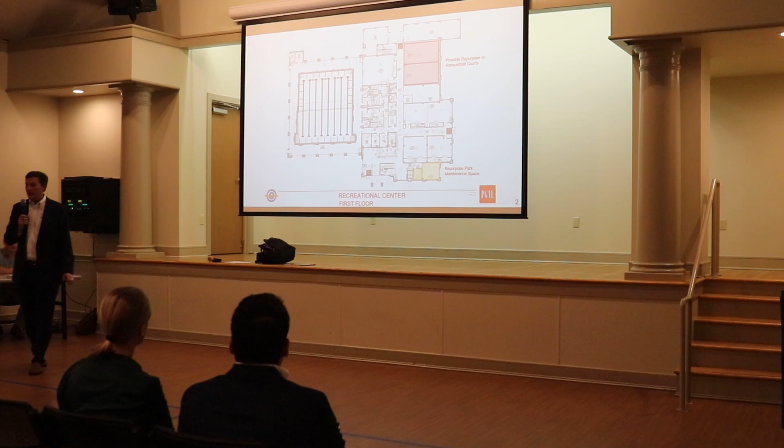So the two areas, there are areas on both the first floor and the second floor. This is the floor plan of the existing rec center that you might be familiar with. You've got the pool located here. This is the entrance, the reception desk, the classrooms, the locker room areas, multi-purpose room, the racquetball courts that are located here.

So the areas that are open for reconsideration, these two spaces here in yellow, those are spaces that are going to be moved to the new public works facilities as part of the Dinkins project. So that square footage is available for reuse. And then the other area being considered for possible reuse based on use is the racquetball courts, and whether or not those could be modified to accommodate different kinds of programs, and what kind of programs could those be.

And then areas on the second floor are the areas here in red. This is where cardio and the weight room are now. There's some office space, and then this is the open balcony area.

There's been discussion about potentially those spaces need to expand to offer more options for equipment or for other activities, stretching, other things. So what we're hoping to gather in this first section are the community's thoughts about the rec center building and what your thoughts are about potential new opportunities that should be considered.

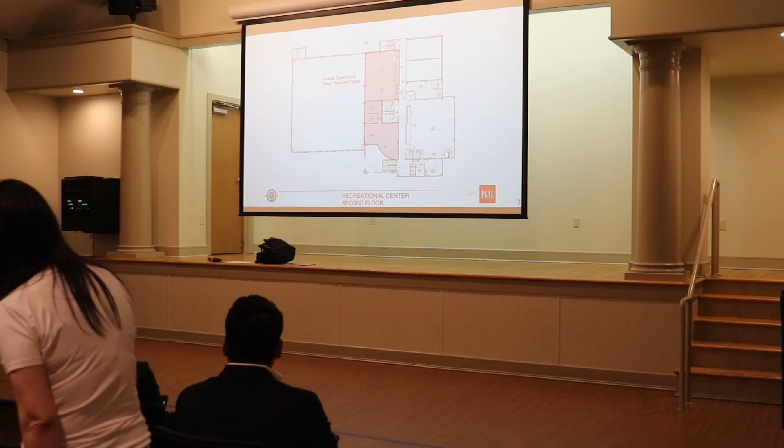What we're going to do with that information is gather it and take it to the Parks Board, and they're going to start their process about how they normally do for park improvements, to go through other public conversations. But this will be the beginning of gathering the community in this room about what your thoughts are regarding that.

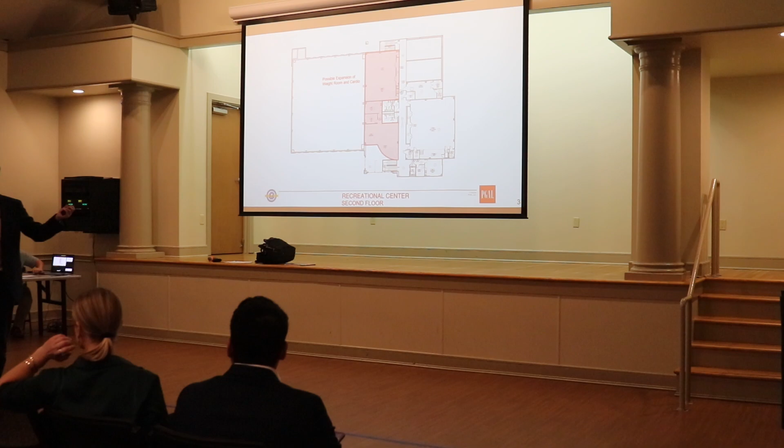So you should have received a piece of paper, and there's more if you need. You should have pens. What we're hoping you will do is take the time to write out any thoughts you have about the rec center, specifically about the areas we mentioned that are in consideration for either modification or repurposing. So any questions about that?

Yes, sir. I apologize, maybe there were materials I should have read beforehand, but I'm concerned that question may be a little too open-ended, and I was hoping you could narrow it down a little for me. For instance, downstairs there's currently 2 racquetball courts. When you say repurpose, do we have any global idea of what we're talking about? Because there's a million things that could be done, right?

For sure. I think what we're looking at is, if you think about it in programs, because that's the easiest way to think about it, what types of programs or spaces would be good additions to the rec center offerings that are already there, right?

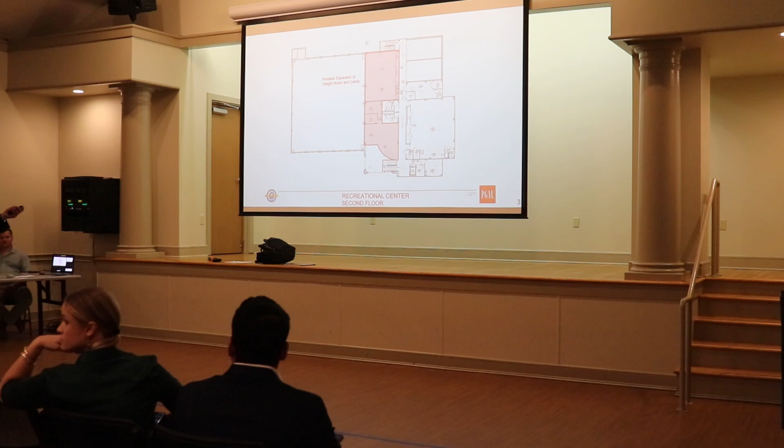And so I think the obvious answer is that there was a time when there was consideration about maybe putting some other use, maybe a basketball goal was being considered at one point. It's too small, I can tell you. It's too small for a pickleball court because I was asked to evaluate that, but it is too small for that.

But that is the area that is here. This center wall can be removed, so that can be either a big space or it could be multiple other spaces. Yes, sir. So just to be clear for myself and maybe anyone else, think of it as a big square with a hard floor.

Well, the flooring could be changed, right? The ceiling could be modified, but the shell walls that would be there, obviously the outside wall is likely going to stay. This wall, and then obviously the front wall. So basically it could be 2 separate spaces, or it could be 1 big space, right?

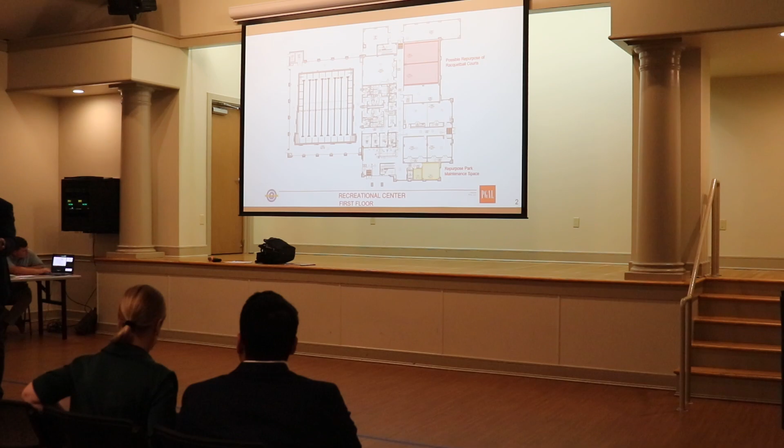And I know that there has been feedback from the community about potentially an indoor play area for toddlers, one conversation that I know the city has had. But there could be other types of uses that you have as users of that space.

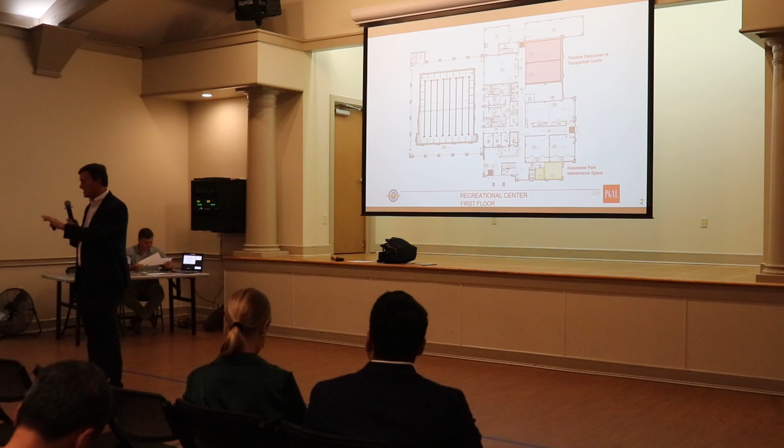But again, this is the beginning of the programming process. We're not making decisions tonight. This information will go to the Parks Board, and we'll be telling the Parks Board what information was gathered here, and then they'll be engaged in the process about how it ultimately gets pulled together. Does that make sense? Okay, does anybody need a comment card or a pen?

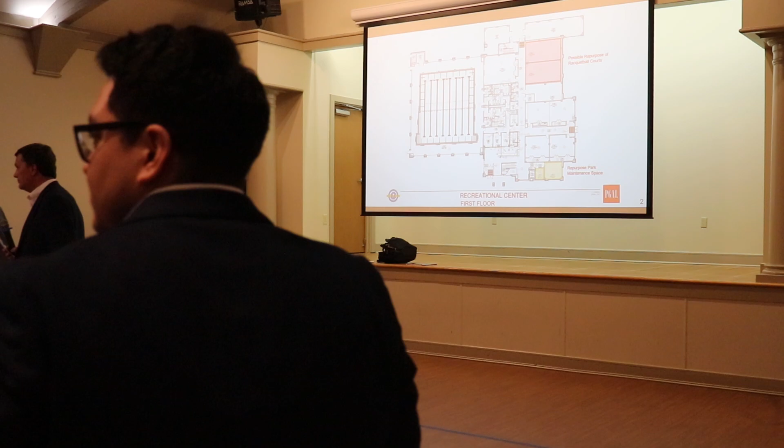Embarrassed to read handwriting, so if I can read mine, I think I can read yours.

Okay, the first comment here is: make it more modern and new. Weight room and cardio room expansion is needed. More modern. Yoga, meditation classrooms. Make center more inviting, more beautiful, kids play area.

The next one is: a week ago, I, along with half a dozen other parents, stood in front of the city council and shared personal stories about the safety of our children due to vehicular traffic in West U, and each of us advocated strongly for council to fund pedestrian mobility efforts for the sake of safety for our children.

I am pleased that the council is taking action, and as part of the new master plan is advocating to close Milton Street between College and Auden. This section of Milton is rarely used, and it is a one-way road that causes confusion. I have witnessed drivers going the wrong way on this section of Milton many times. Closing it and making it a pedestrian corridor is the exact thing we should be doing.

I strongly encourage our city to push forward with this design and continue pursuing other pedestrian-friendly projects. So this sounds like it's more related to the next piece, so I'll reread this one when we get to that one, because there'll be some more to talk about.

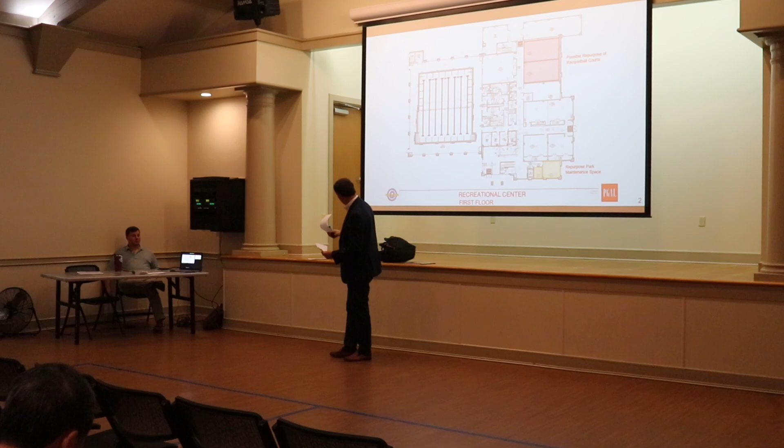The next one is, why do we not open at 5 a.m. anymore?

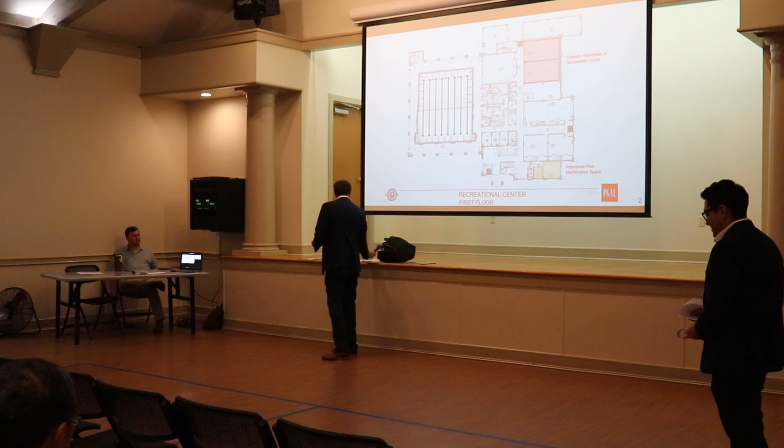The next one is, please expand the cardio and weight room. It's too much wasted space upstairs, not enough weight equipment.

The next is, expand cardio weight facility. Two rowing machines are in the hallway. People also go in the hallway to stretch. Racquetball court two, and then there's nothing after that. And then there's badminton, question mark, and the yoga rooms, question mark.

The next one is, I use the pool two times per week and gym area three or four times, usually come between 9 and 11 a.m. Rarely have trouble accessing equipment or the pool lane at that time. Current configuration suits me well. Biggest need is probably space for mat work, which many folks now do in the hall, perhaps the yellow area.

Which I think they mean this area here. The next one is, very good, no need to expand.

Any other comments regarding the recreation center? Yes, I do think, having spent some time looking at this, that those old maintenance rooms, the yellow ones, are very small. So whatever it is we end up doing, I think we have to keep our minds on what has the smallest footprint, because that's definitely what you need to focus on when it's the maintenance space. A number of people talk about mats, right? Mats have a small footprint, individual maintenance. Just taking that out, okay, thank you.

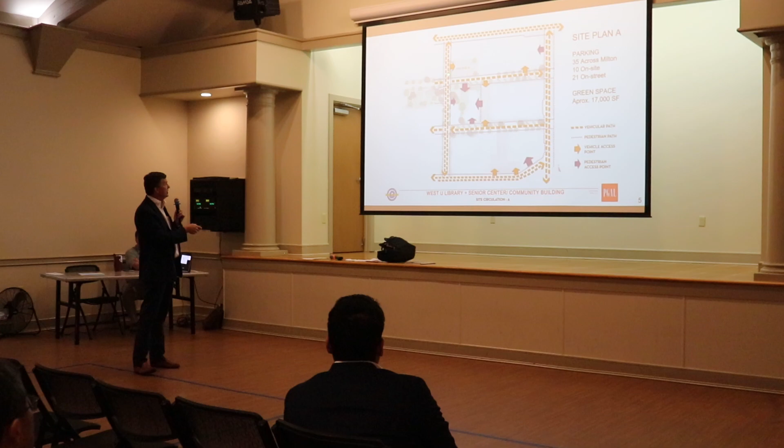We also want to remind you that pedestrian traffic through this area is important. Currently there are sidewalks on all the perimeters, but as part of the urban planning, there was discussion about enhancing those sidewalks, making them wider inside the Civic Center area, as a potential option to help mobility of pedestrians to the Civic Center. That could happen on these various side areas within the zone.

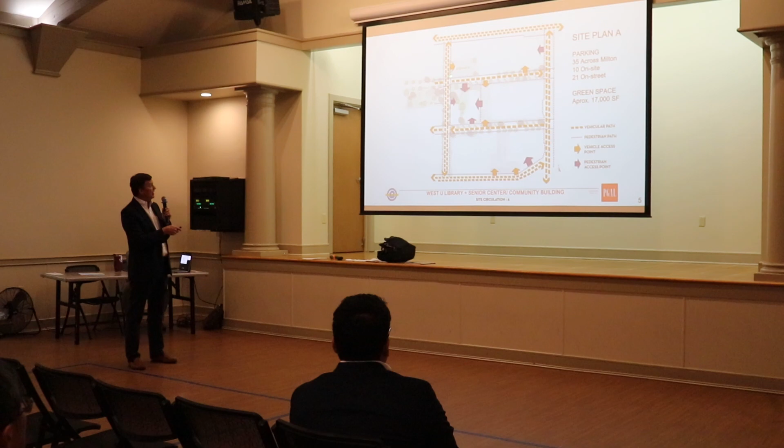So we're showing you how vehicles would access city parking lots. This would turn into a city parking lot, which is where the operations and maintenance buildings are now. There is a single loaded parking lot drive access located right at this edge of the site, with 90-degree parking located on the side. Pedestrians would access the municipal building and this site the way they do today, and cars would get into those parking lots like they do today.

Again, I'm only showing city-owned parking in these examples. In Site Plan A, in this area, which includes this parking lot and the street parking, there are 35 parking spaces in this zone. There are 10 more parking spaces I'm calling on-site, right here, and 21 angled spaces on street.

So that gives you an idea about what parking we're showing in this area under this scheme. And this represents about 17,000 square feet of green space, not counting the area around the existing water tank.

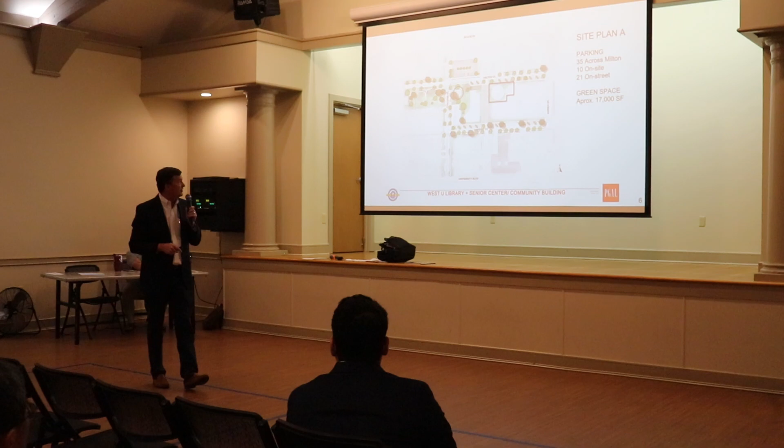If you can go to the next slide, please. So this is just a more rendered version of that same site plan, so you could understand. We are intentionally isolating the water tank from this conversation. So we want to gather feedback on circulation by itself. We're going to want to get information on the water tanks by itself, and the building test fits by themselves, and then the architectural strategies by themselves. So we're trying to isolate those so we understand your feedback on which topic more clearly. Does that make sense? So again, we're focused here on circulation, and this just gives you an idea about how that could work. And again, we've colored in the city parking on-site parking spaces.

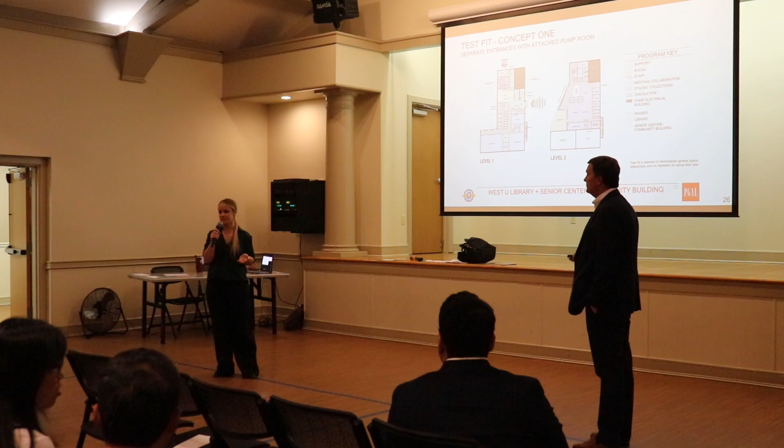As Jeff mentioned, there are two big ideas we would like your feedback on. Again, we're really looking at adjacencies, how these spaces are next to each other. But the two big ideas are how you enter the building and how the lobby is shared between these two spaces. So in this first test fit, concept one...

This one is separate entrances with the attached pump room. If you remember the previous examples with the tank options, this one has the pump room attached to it. In this option, you enter the library off of Milton into a separate lobby with checkout spaces, a feature stair with some tiered seating, and all of your library sorting spaces behind the lobby, then you go upstairs to the main library.

So you have to enter on the first floor—that's where you enter. For the community center side, it's a completely separate entrance. You enter from the parking lot that we've created, into a lobby. You can go into a gaming area, and then as you go down the corridor, it has all of your staff spaces and meeting spaces.

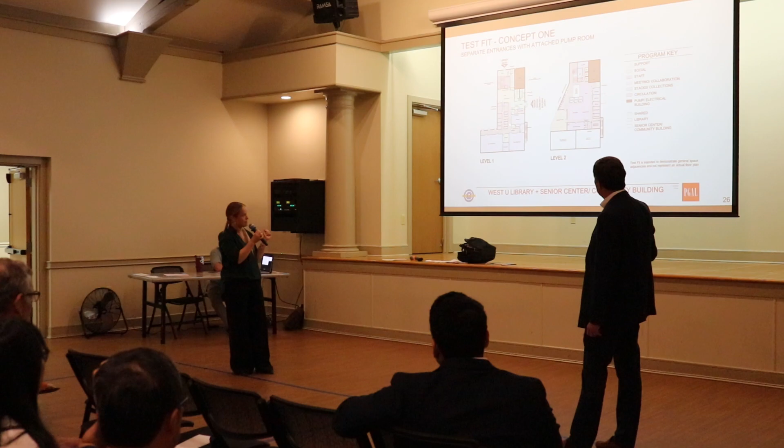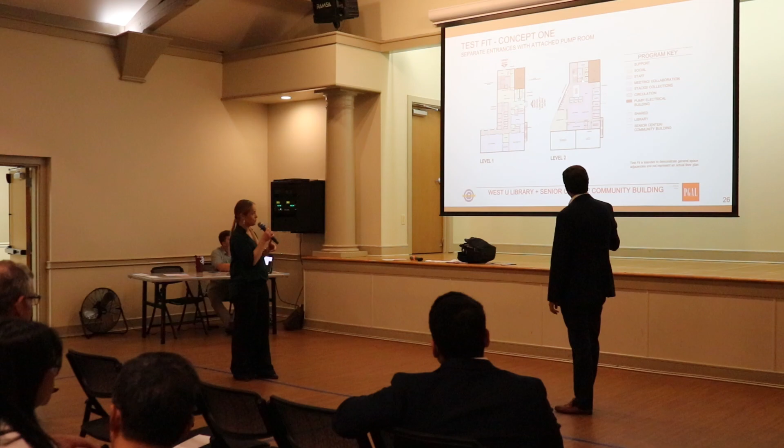So that's really the big idea. Now, where all these spaces end up, as Jeff said, is going to change and shift as we progress, but that's one of the big ideas. As you move upstairs, all the library spaces, with the exception of the entry, are located upstairs. So you enter, and you have all your stacks centrally located, restrooms, an outdoor patio, and all your meeting spaces around the perimeter with staff spaces. That is how we're separating these two functions.

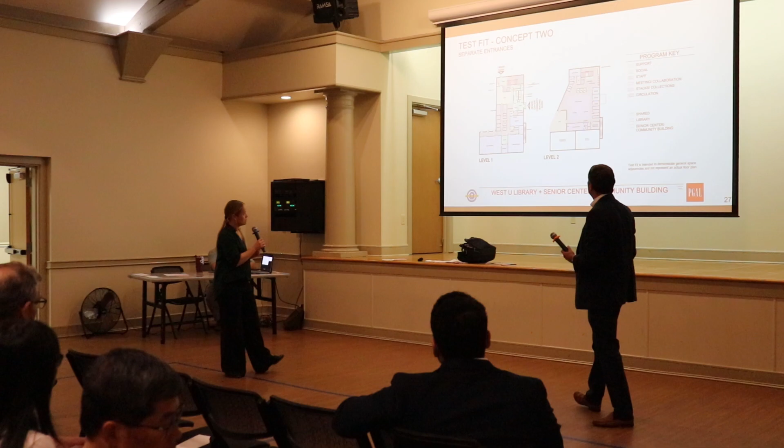So concept two is the same, except we are detaching the pump room. This gives us a little bit more flexibility with the building, but as you can imagine, less flexibility on the site. So that's just something to keep in mind.

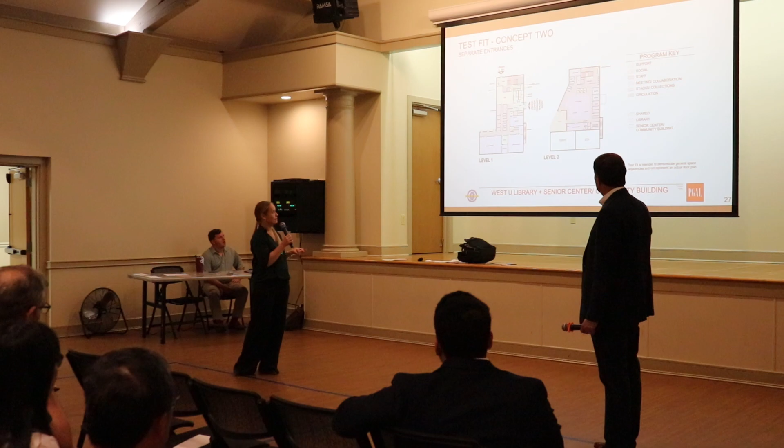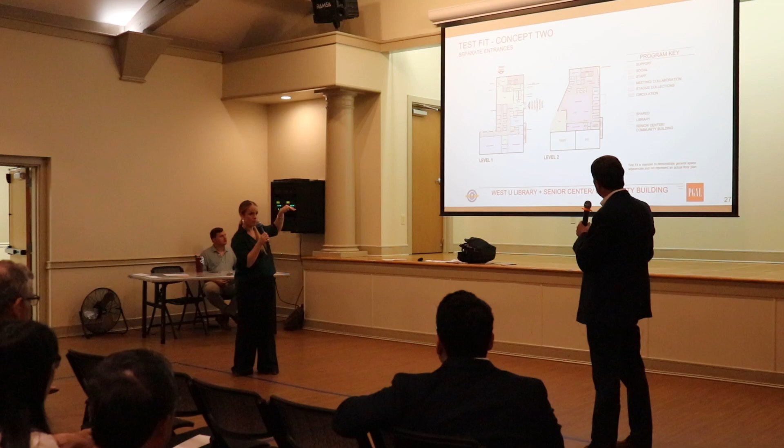But you still enter the library separately from the community center, and they're separate functions. You enter from separate sides, separate streets. There's not a lot of overlap, except if you want to go to the community center, you have to walk outside the building to go to the library and vice versa. So the big idea on this one is there are two identifiably different entrances to these two functions. The library is essentially on the second floor, the seniors and community building is on the first floor. To get from one to the other, you have to go outside and go in a different entrance.

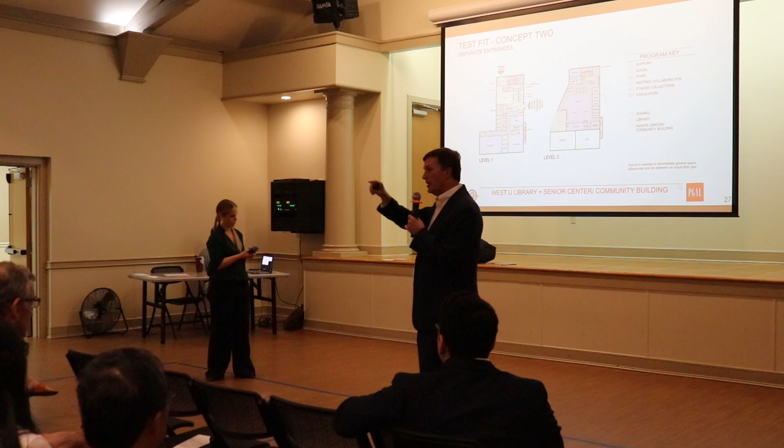Can we go through all of it? What's the size of the building? Is there more books? Generally speaking, what size are y'all? So the program for the community building is a few thousand square feet more than here, as well as the library, which is 1,000 to 1,500 square feet bigger as well. Full spaces grow, yeah. So let's get through all of it, and then we can come back for number 3.

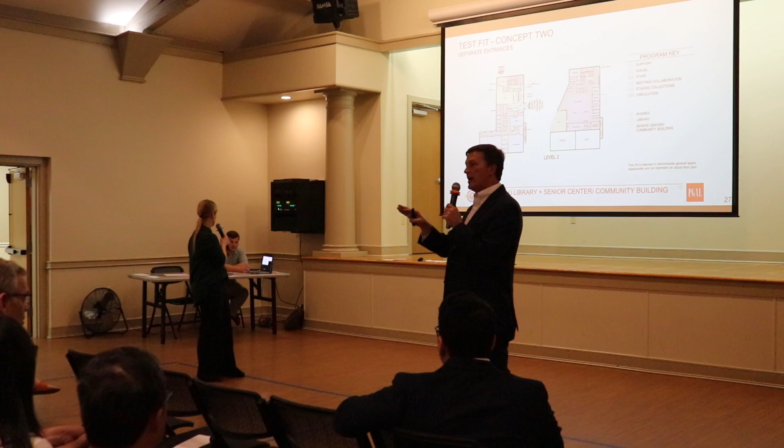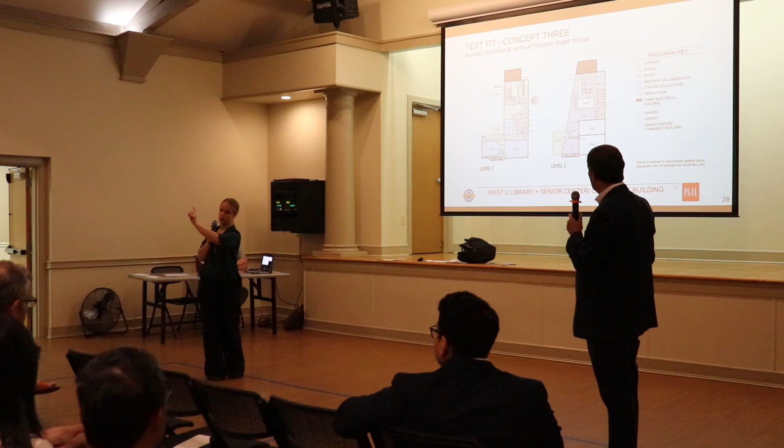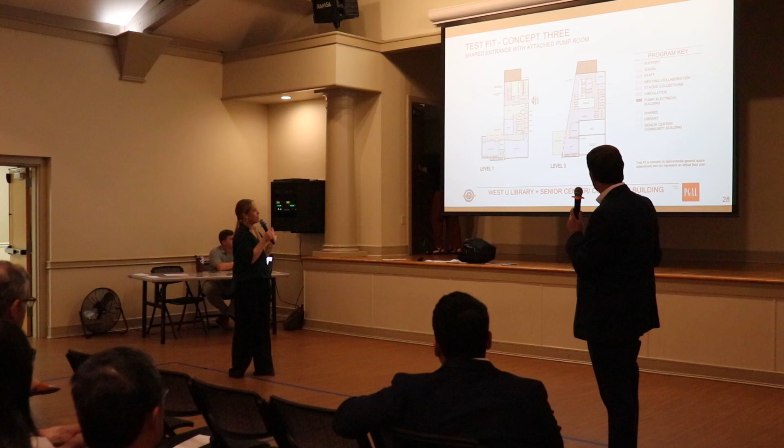So, test fit number 3, you have a shared lobby. However, you'll see this bigger when you walk around to the boards, they're going to be on this side. You have a shared lobby with shared restrooms, and then you either go straight to the library with the same checkout services, stairs, etc., or you turn left and go into the community center. So then you go down the corridor and go to your meeting spaces or your staff spaces. So that's the big idea.

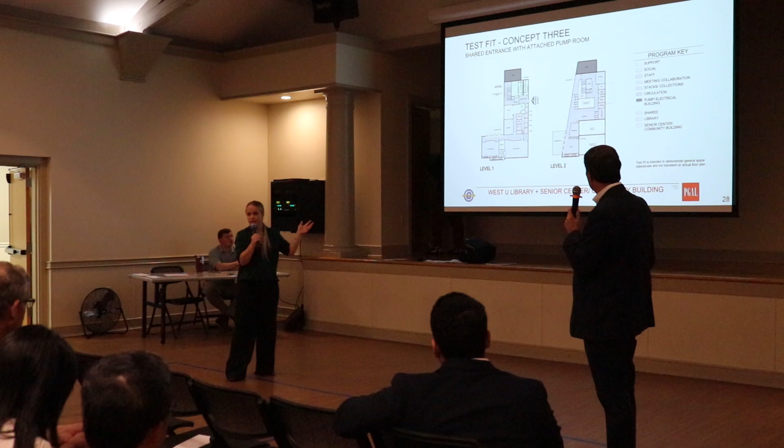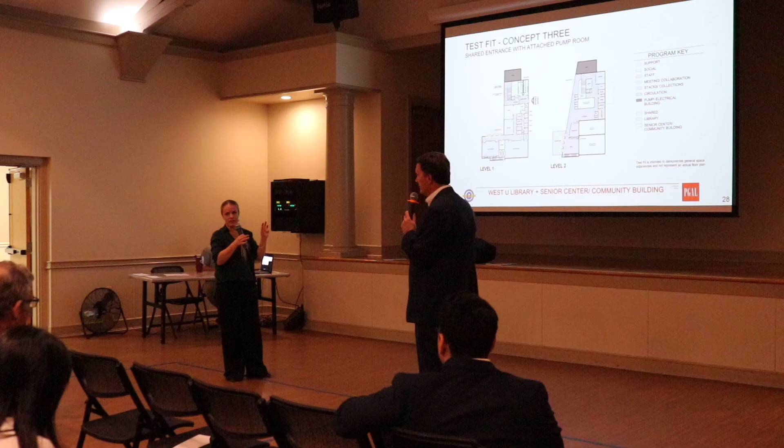And then again, you go upstairs and you can take a look as you walk around on which spaces you prefer next to other spaces. But again, the big idea is, do you like the idea of coming into the building? You'll have this overlap of seniors going to the community center side and other children going to the library, and there's that moment of interaction. How do you guys feel about that?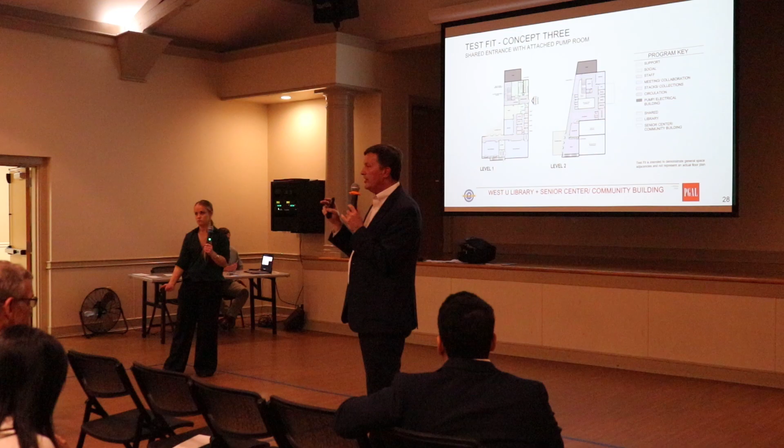So in the previous feedback, there were a lot of people who said the library should be separated from the community center, and some said it should not. So what we're really trying to do here is show you both of those ideas to get additional feedback now that you're looking at something that looks like a building, so you can better understand how it would work if you had a common entrance versus if you had two separate entrances.

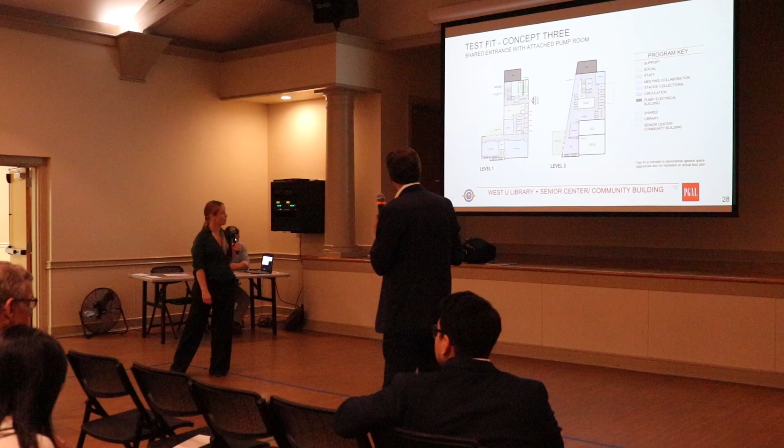Concept 4. It's the same shared entrance except we have removed the pump building. The layout is a little bit different, so you guys can just get a taste of how these different program elements can be laid out. We just wanted you guys to see how we can play with those pieces, but the big idea here is a shared lobby. So as you walk around, keep that in mind.

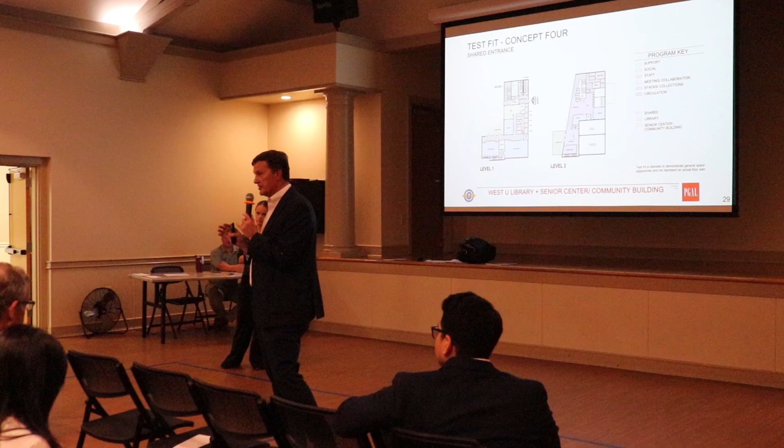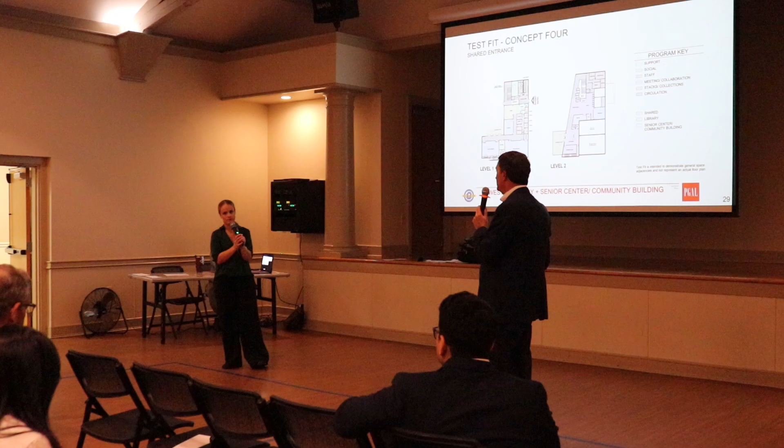So again, there's four concepts, but really two big ideas, right? They either share a pump room or don't have a pump room. So what we want feedback on is: is a shared lobby preferable to separate entrances for the library? That's the big question we want to get tonight. Is there a preference in how that works? Because we can do acoustical treatments to treat the pump room, just FYI. Okay, so can you go to the next slide?

So the last thing we want to do is talk about the architectural treatment of these buildings. We have, I think, 8 different strategies that we wanted to get feedback on. What we heard in the town hall comments is a lot of people said we want this building to look like West U. We need some help on what you think West U is, right?

And so we're going to give you a bunch of different architectural identities, none of which will be the final answer. But we're giving you some examples that you can weigh in on and say, I have a preference for this versus that. So Justine's going to walk you through these.

I'm sorry, before we do that, I'm getting lost. We went through that site stuff. We were going to talk about that later, then we wait for questions. Then we went through 4 possible combinations for buildings that currently are moved over that. We're going to wait to the end for questions. Now we're about to go through 8 architectural options. I can't remember all my questions. You want more? No, I don't want paper though, because my questions are going to be so far from when we talked about it. I'm not going to remember what I'm talking about. Can we pause for a moment and maybe ask questions about, or have questions about the 4 different locations and the 4 different building options and the 2 things you wanted us to answer?

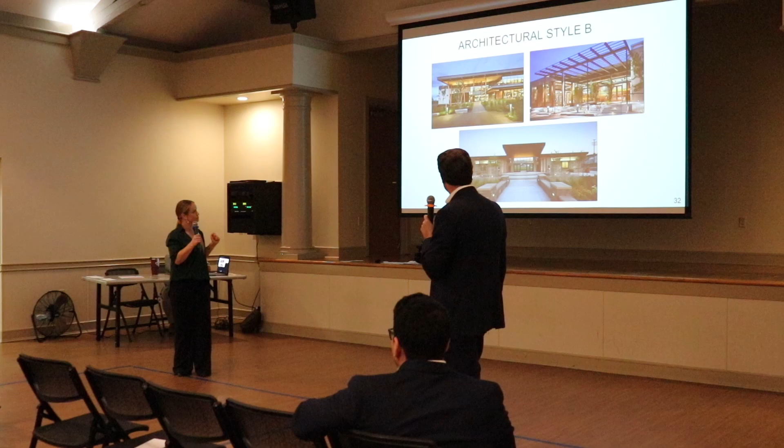So the first style we're calling Style A. This is really about a lot of opportunities for shade, a bit more modern in style and language. Style C is very modern, more minimalistic in nature, with very simple forms.

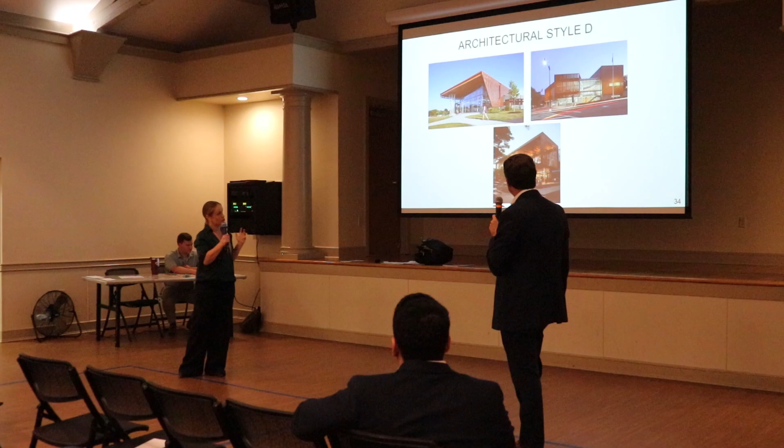Style D has a more industrial feel. It has a lot of transparency to it, also a bit more modern.

Style E is quite a bit different, opposite direction. It has a very residential feel to it, as you recognize the Westview Recreational Center. So just again, wide range.

Architectural style F is more about screen facades. It has a rhythmatic nature to it. Certain level of transparency, but also mostly about screen.

Style G is very traditional. It does have some elements of residential, but it has more of a civic presence to it.

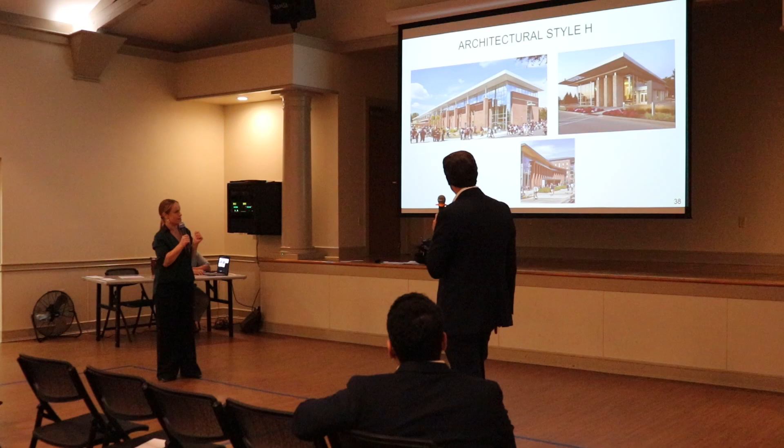And then architectural style H is similar to G in that it has a civic presence to it, heavy columns, but it takes away the residential feel, so it feels more like a commercial building as opposed to the previous one. So again, this is not a full range of styles, but they're all very different, so we can know which ones you guys lean to and which ones you're just no, right?

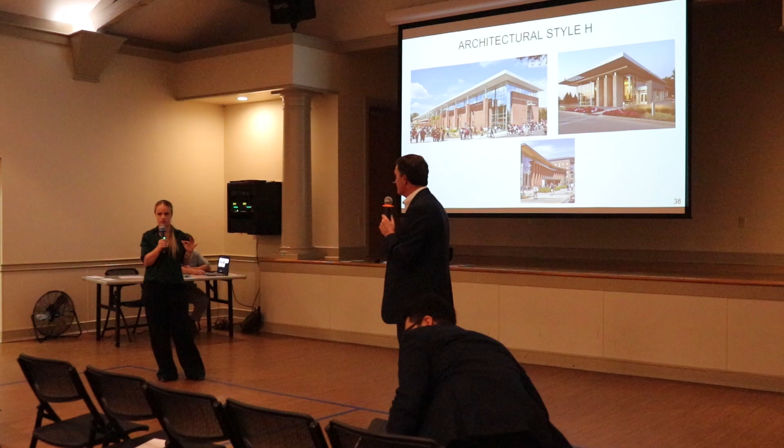So let's talk about how we want to gather information about this. We have two different methods we're going to do. We're going to hand out some new comment cards for you to comment on any of the topics you want. And then we're going to hand you some sheets with 8 green dots on it, and the dots are going to be a number 1 on some and a number 2 on some.

And we have on this side of the room, and we need to turn those last two boards around - those are the architectural styles. So what we want, if you could go - this is what we're asking. So if you have a first preference for any of these, let's just use this as an example.

On this first board is the site circulation. The top two is site plan A, the bottom two are site plan B. So if you have a preference just for A versus B, we would put the green dot for 1 on site plan A, and if site plan B is your second preference, you put a 2 there. If you don't like one or the other, I wouldn't put a green dot at all.

In terms of the water tank locations, there are 4 different options, and we're asking for you to tell us which is your first preference and what is your second preference with the 1 versus the 2. Obviously, there's 4 choices here, so we're just looking for what are your top 2 preferences for those ideas.